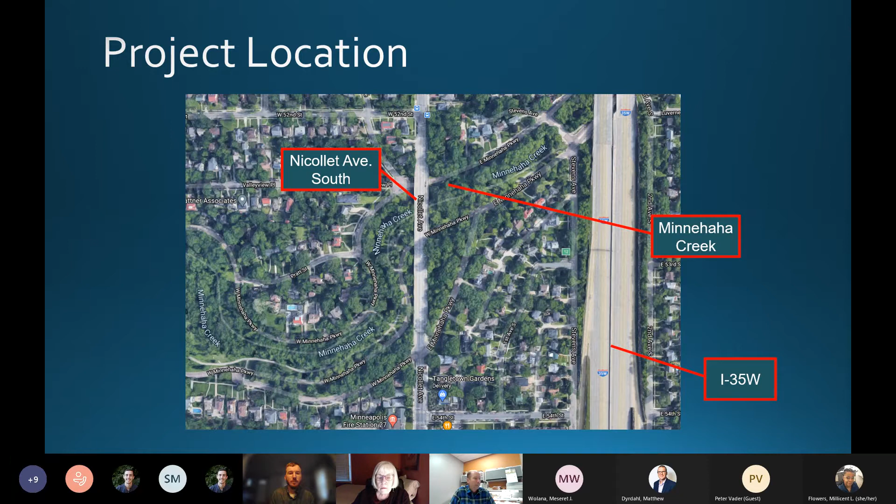There we go. So some history of the bridge. It was constructed in 1923, replacing an original bridge that was constructed in 1908. The current bridge was rehabilitated in 1973. At that time, the deck was taken off, and there were some repairs done on some of the cantilever floor beams, and new sidewalks were put on as well, and new railings. The sidewalks were widened again in 2002, to the inside.

They widened the sidewalks on each side to 12 feet, and then 4 monuments were also placed in the 4 corners. This was done as part of a neighborhood repair to the bridge to discourage speeding, for one thing, and also to add the monuments and some of the ornamental lighting as an aesthetic piece to the bridge. The bridge is eligible for the National Register of Historic Places as well.

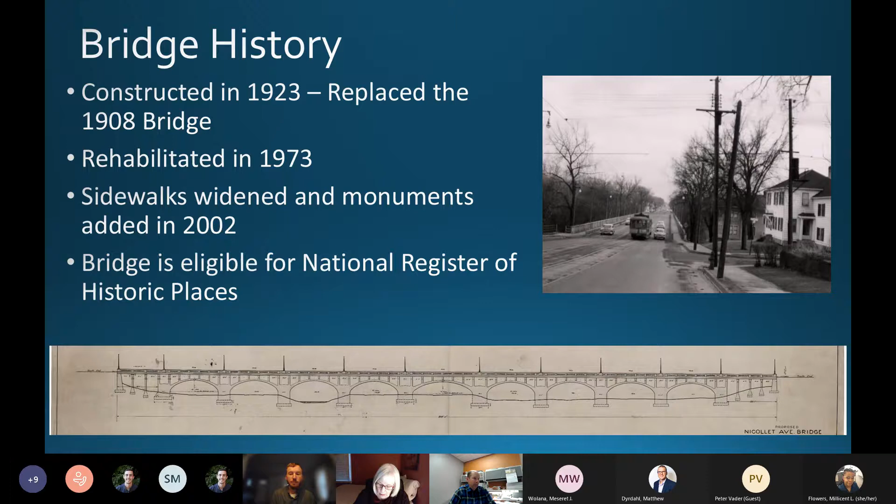Brief description of the bridge: it's 816 feet long, approximately 62 feet wide. There are 9 concrete arches and 7 concrete slab approach spans. 8 of the 9 arches span 60 feet. The center arch span, which goes over Minnehaha Parkway, spans 75 feet. The bridge deck is supported by floor beams, spandrel columns, and cantilever brackets, and the concrete piers are supported on timber piling.

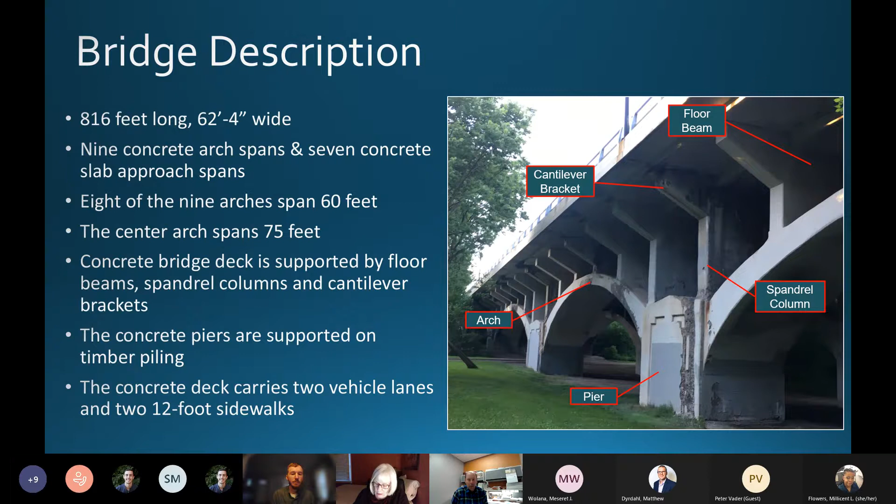So there's some nomenclature of the bridge there in the graphic. The concrete deck carries 2 vehicle lanes, 2 12-foot sidewalks, and also 2 7-foot bike lanes.

The need for the project is a rehab due to deterioration of the bridge's main structural elements: the deck, the floor beams, the columns, and the arch ribs and piers. Those need attention due to water infiltration through the many deck joints of the bridge, which has gotten into these structural elements, and concrete and reinforcement steel has deteriorated through the years.

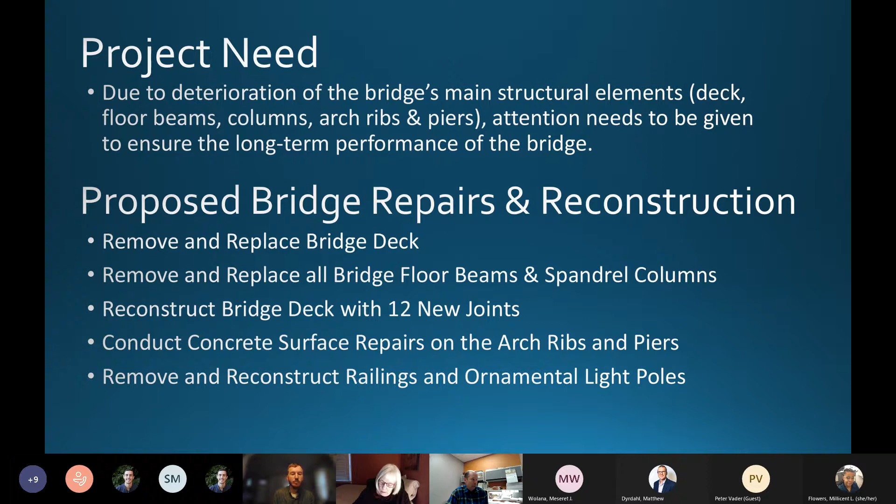Our scope is to remove and reconstruct the bridge deck, remove and reconstruct all the floor beams and spandrel columns. We're going to reconstruct the bridge deck with 12 new joints, significantly reducing the amount of joints that are there right now. We're going to conduct surface repairs on the arch ribs and piers, which will entail removing deteriorated concrete and putting reinforcement and new concrete back in its place. Lastly, we're going to remove and reconstruct the railings and the ornamental light poles.

Some of the constraints we're dealing with: structurally, the overall width is primarily governed by these floor beam cantilevers. We can't extend those any more than they currently are, part of this for historic reasons and part for structural reasons. So the overall bridge deck width needs to be slightly narrower than the existing.

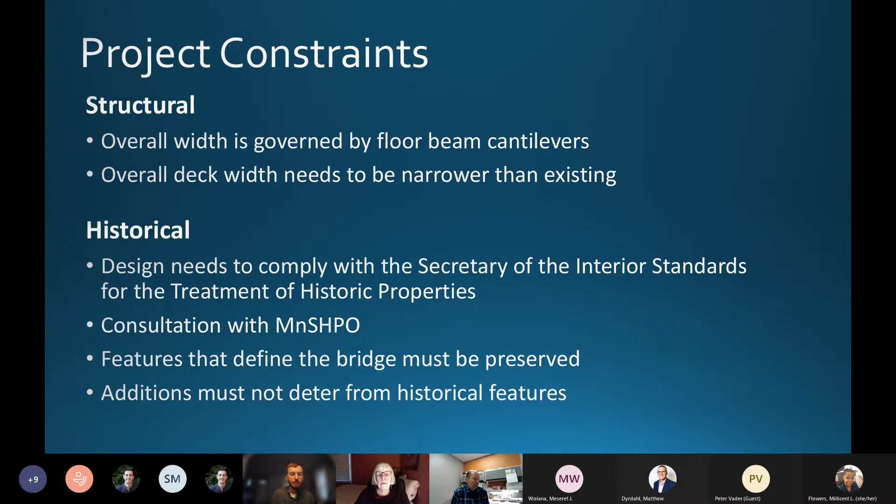Historically, the design needs to comply with the Secretary of Interior standards for the treatment of historic properties. We do have a historian on board; she will work with us in consultation with Minnesota SHPO. The features that define the bridge must be preserved. The main feature is the concrete arch, and the combination of the spandrel columns and floor beams is also a very important historic feature. Any additions to the bridge must not detract from the historic features.

Here's the project layout. Everything in orange is primarily the bridge, which is 816 feet long. We're doing some approach work on the south as it intersects with Minnehaha Parkway, and also a little bit on the north tying into Nicollet Avenue just before 52nd Street.

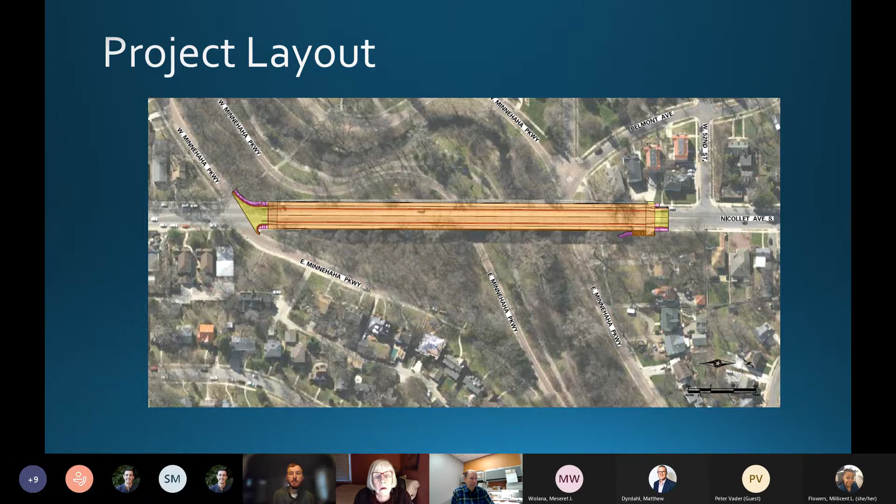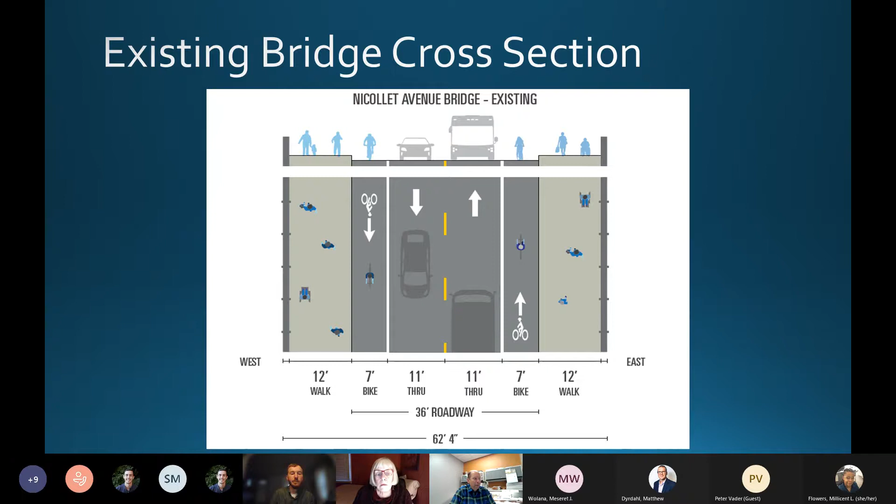Here's the existing cross section. Currently we have two 11-foot through lanes, two 7-foot bike lanes, and two 12-foot walks, giving us a 36-foot width for our roadway. We also have on each side of the deck a pipe railing—more like a pipe barrier—on top of a concrete parapet. The overall width of the bridge deck is 62 feet 4 inches.

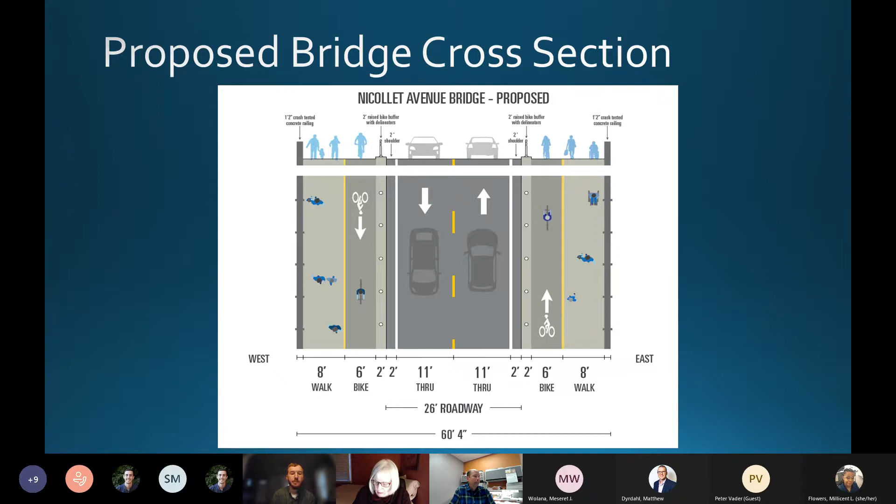This shows the south approach at the intersection of Minnehaha Parkway, where the two roadways come up to the bridge. This shows the cross section: an 8-foot walk, 6-foot bike lanes, 13-foot through traffic, and how we're transitioning into the existing conditions—a 6-foot walk, a parking area, a 6-foot bike lane, and a 13 or 11-foot through lane. That's on the south side.

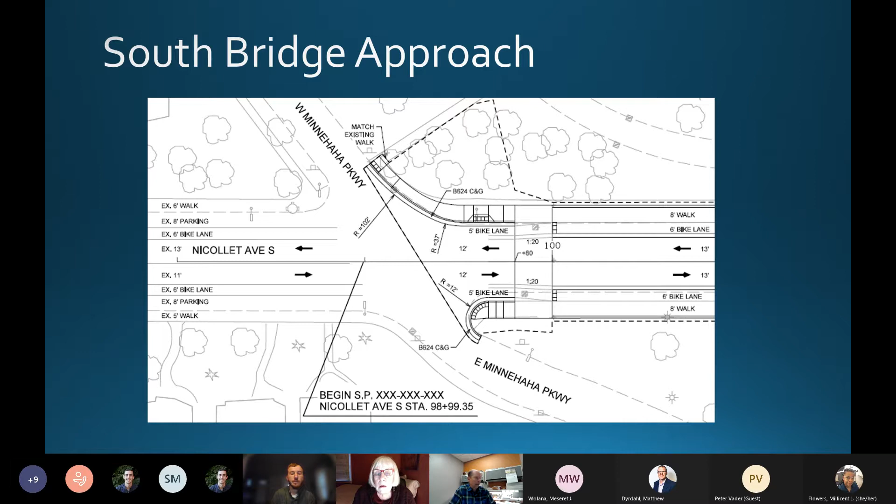On the north side, similarly, we're transitioning right before 52nd Street. The 8-foot walk will transition to an approximate 4.5 or 5-foot walk. The 6-foot bike lane will transition across 52nd into a 5-foot bike lane. Similarly, on the east side, we've got the 6-foot bike and 8-foot walk transitioning back into the existing condition as we head north on Nicollet.

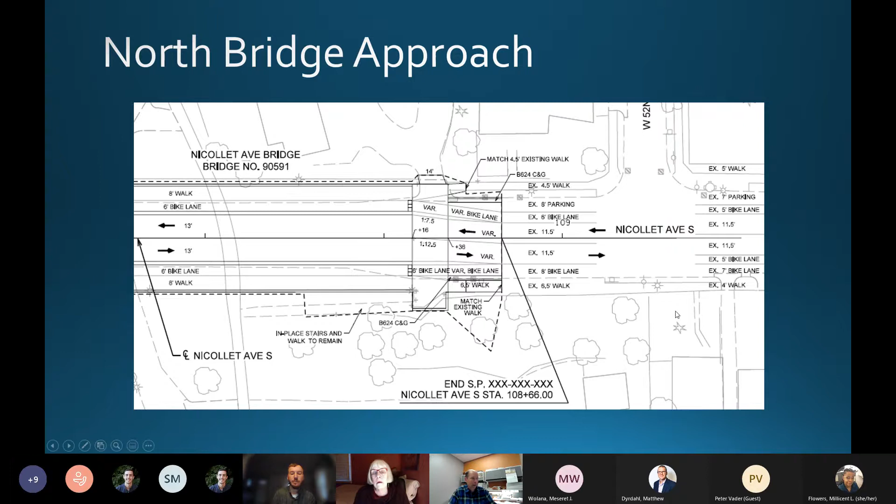The bridge railing—the existing railing is a metal pipe railing on a concrete parapet, approximately 4 feet high. The proposed railing will be similar to what we have out on the recently opened 10th Avenue Bridge, at 3.5 feet high. This railing also closely resembles the original railing on the bridge as constructed in 1923.

That is all I have as far as the presentation goes. Certainly could take questions.

Are there any questions for Mark or Forrest at this time? Or comments?

What is the plan for construction? We do not have a letting date right now. The city is still trying to obtain project funding for construction. I think it's in the STIP right now, maybe for 25 construction. So we're hoping to get some money in the next legislative session, or perhaps even with the infrastructure bill.

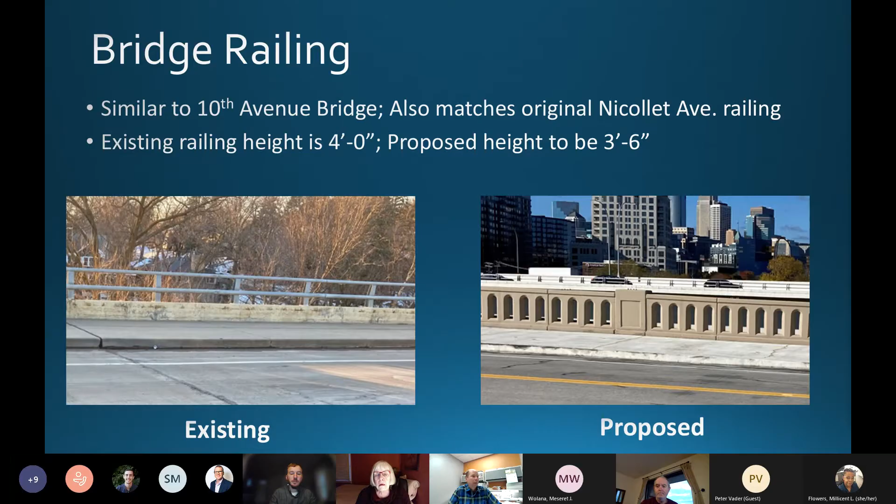Yeah, I can go back to it here. Just a minute. Actually, I got a real good photo of the 10th Avenue Bridge that was recently constructed.

So it's what we call a bike buffer. It's two feet in width and seven inches tall. So it's basically a raised median that's going to separate the vehicular traffic from the bikes. And then there's opportunities to put delineators on those as well, for let's say winter snow plowing, or just to define where they start and where they stop.

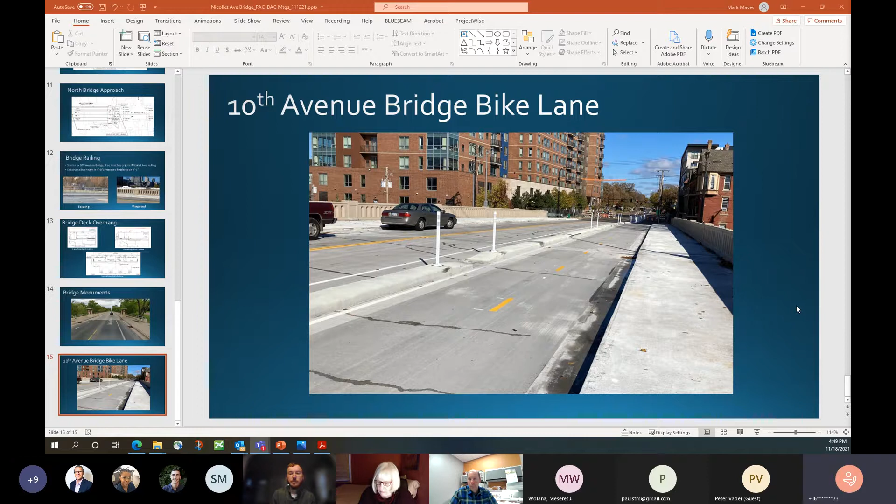I'm wondering if there are any adjustments being made to the design based on projected flooding for Minnehaha with climate breakdown. I know we've seen presentations from the park board around the floodplains and what's expected, but I'm curious in your planning how that's impacting design.

I'm sorry, I didn't get the first part of the question. The flooding, with the creek there. I don't have a sense of how it may or may not flood in 100-year or 500-year flood events, and the park board has come in front of us talking about ways they're looking at mitigating the impacts of extreme rainfall events from climate breakdown in that area. I'm curious how that is impacting your process.

I don't think it'll impact us too much. We're primarily working at a considerable height above that. Our arch ribs are primarily above that 100-year event. We're not doing anything to the grading around the bridge, and we aren't doing anything to the pier columns or the pier foundations. So I really don't think the water level is going to affect the rehab that we're doing. This thing is considerably higher than, let's say, the 100-year water elevation.

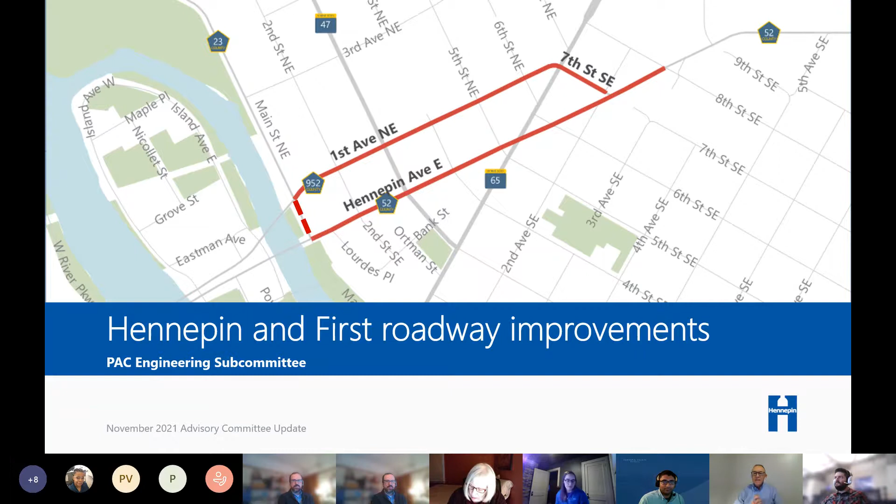So hit the next slide, Cody. We're here to talk about Hennepin and First multimodal improvements, and we'll get to what that is in a moment. But first, where we are in the process.

We were here before this group about a year ago, done a lot of work in the interim, and we're down to 2 concepts right now. Today we're here to start sharing those concepts with you. We're at the start of approximately a 30-day engagement period. We kicked it off with an open house last night, and so we're very happy to be back here with the Pedestrian Advisory Committee to talk about some of the pedestrian improvements we intend to implement there.

Next. Thanks, Cody. So the project area we're talking about is First and Hennepin, from Main Street up to 8th Street, where the 2 roadways come back together. Since we were here a year ago, we've actually added a small piece - a block of Main Street between First and Hennepin - in cooperation with the Minneapolis Park and Rec Board. They have identified funding to put in that missing link in the trail system right there, and so we are working with the Park Board to design as part of this project, and ultimately to construct as part of this project, that piece of the seam.

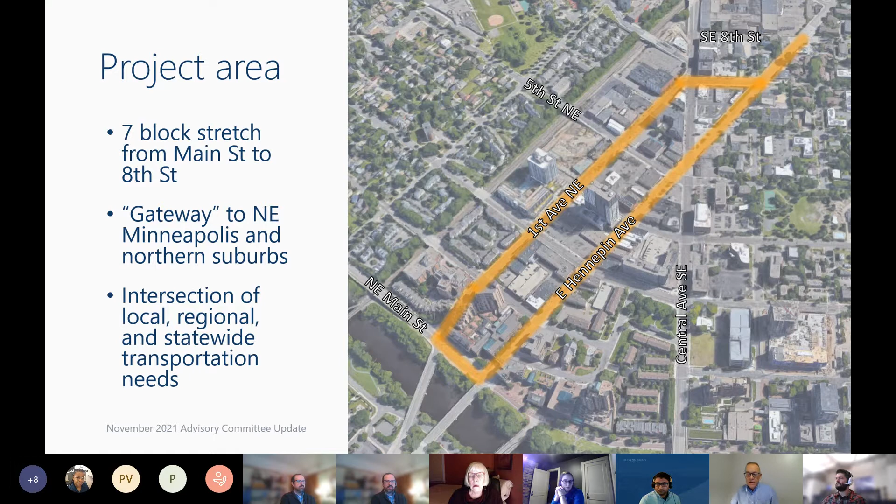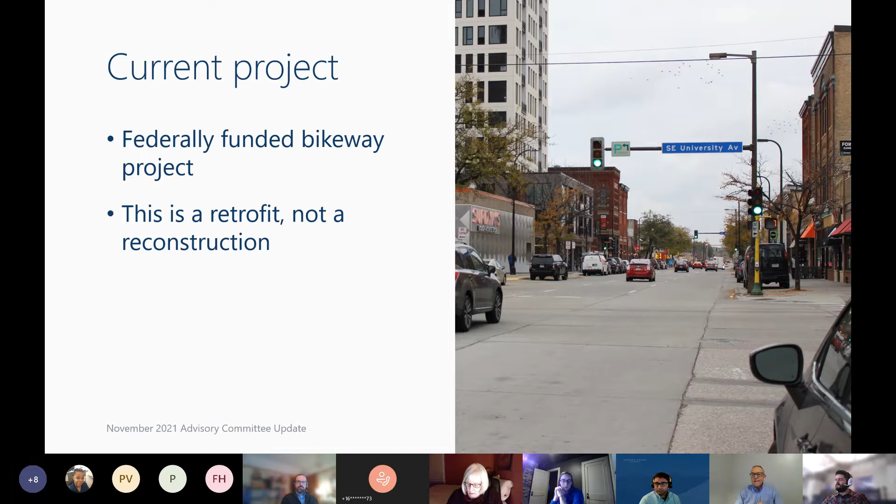Next slide. So the current project is a federally funded bikeway project. The scope of the project is to add a bikeway to First and Hennepin in that project area. In addition, we are making accessible pedestrian improvements and replacing traffic signals through this area, including accessible pedestrian signals. Importantly, this is not a total reconstruction of the roadway, which somewhat limits the scope of what we can do here. It is a retrofit, so we'll leave the roadway as is, and we will add a bikeway to it, as you'll see in a little bit. Next slide.

So the schedule: we are currently in the early stages, the planning phase, and we intend to be in that planning phase for the next few months, at least into 2022. At the bottom of the screen, we have completed the first phase, existing conditions. We've developed a vision of the corridor, and we're towards the end of the second phase, which was to develop, test, and evaluate corridor concepts. We've run a number of concepts through our project management team, and we've settled on 2 to bring out to the public, which you'll see here in a little bit. The next phase, over the next few months into early 2022, is that we'll select one of those alternatives, put more preliminary design into it, and ultimately take it to the city for approval.

After that, back up to the top there, the blue bar, we will be into design of the facility, out of the preliminary and into final design from 2022 into 2023. We anticipate construction in 2024, and we do anticipate it just to be a 1-year construction project. That will sync up pretty well with the proposed E-line construction as well for Metro Transit.

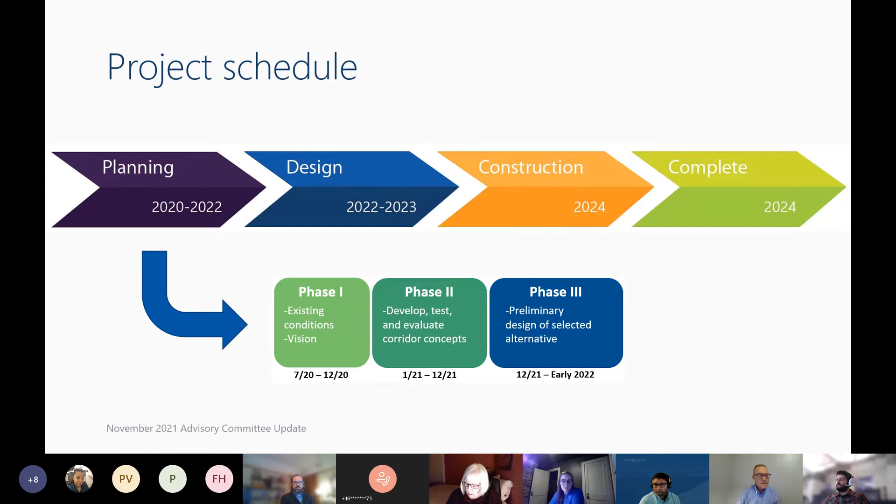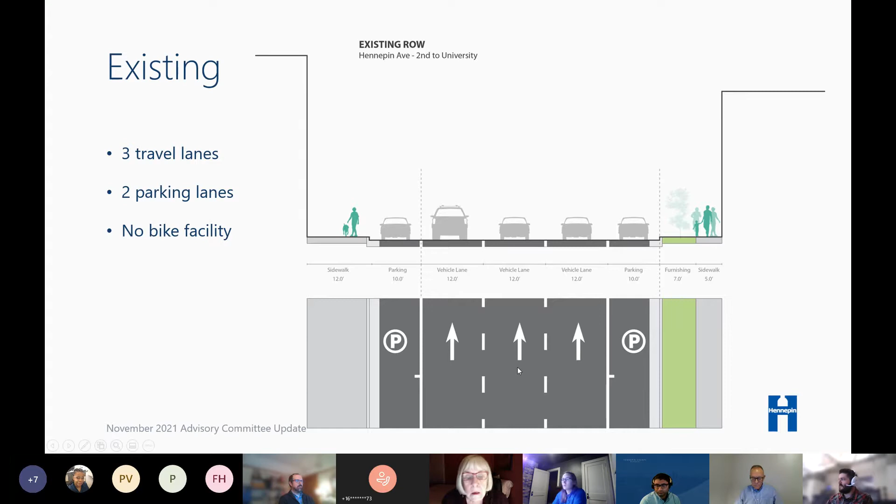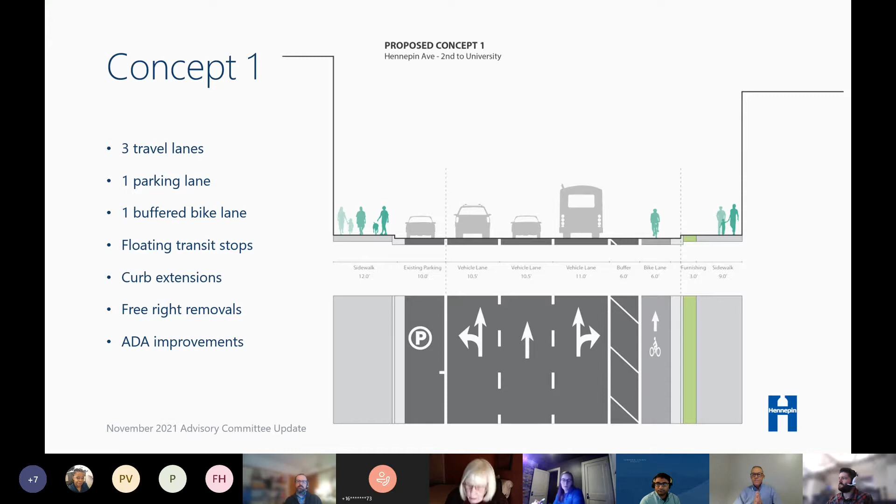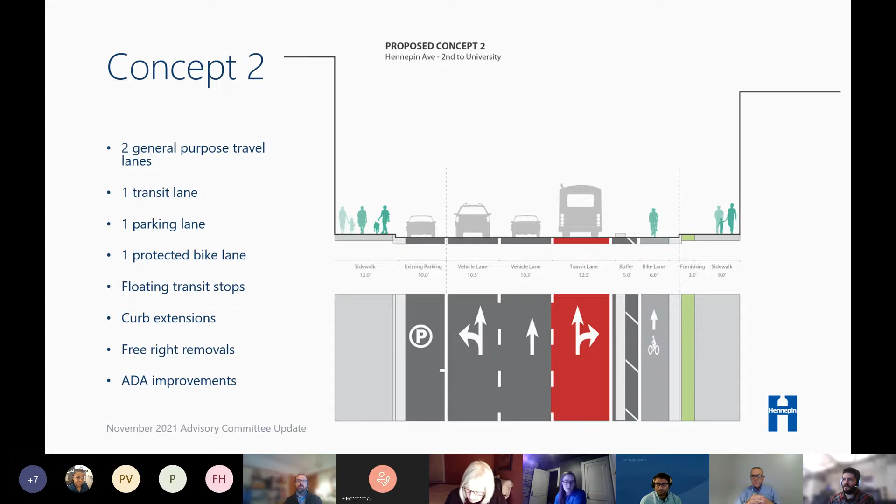Our concept 2 creates a separated, or protected, bike lane on that same side of the roadway. So we install that curb, similar to what was shown on the previous bridge project. Then here we have that rightmost travel lane dedicated to a transit lane, keeping 2 general purpose lanes on the left side along with the parking. Again working with the existing curbs where we can. Similar to concept 1, we have the floating bus stops, curb extensions, free right removals, and ADA improvements.

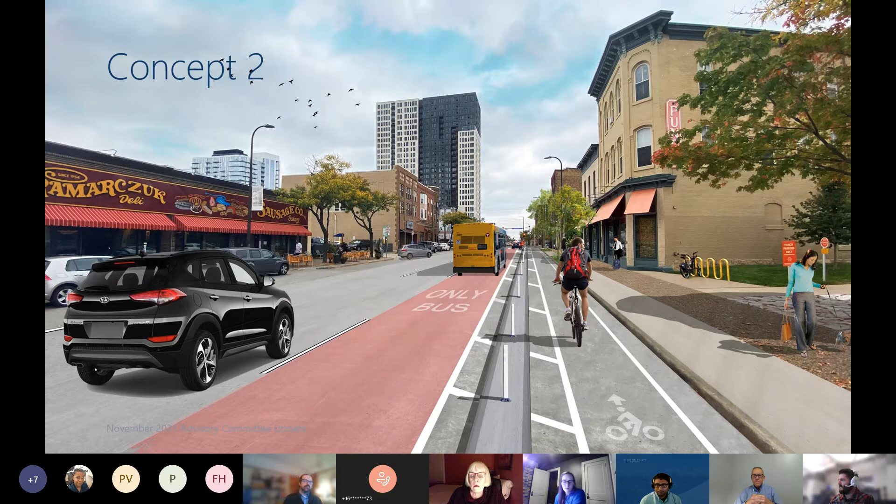So here again is a rendering of that same location for concept 2, showing that transit lane and protected bike lane along the right side of the road.

So I want to hit on a few things that are included in both concepts but are key features of what we're trying to do with the project. We are proposing removing both channelized right turns along First Avenue. At the intersection of First, Central, and 7th, there's a free channelized right turn coming off Central onto First. We are proposing to remove that while keeping the driveway access for that particular property.

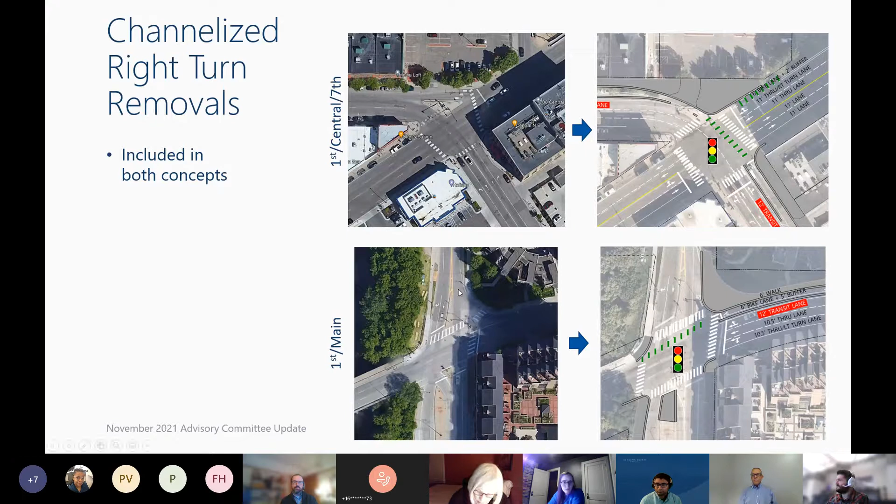The second one is over on Main Street at First Avenue, where again you have the channelized right turn going westbound on First and getting on Main Street. We are proposing to remove that free right movement, still including a right turn/through lane, but making that a much safer area for those walking and biking to get around these intersections. That's included in both concepts.

Another thing included is filling the gap on Hennepin Avenue between Main and 2nd. That's also included in both concepts, but we are proposing to fill that sidewalk gap as well.

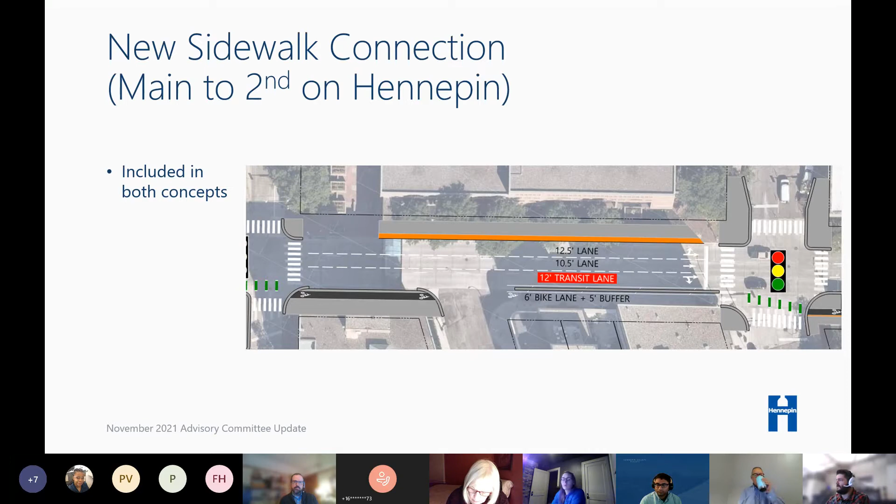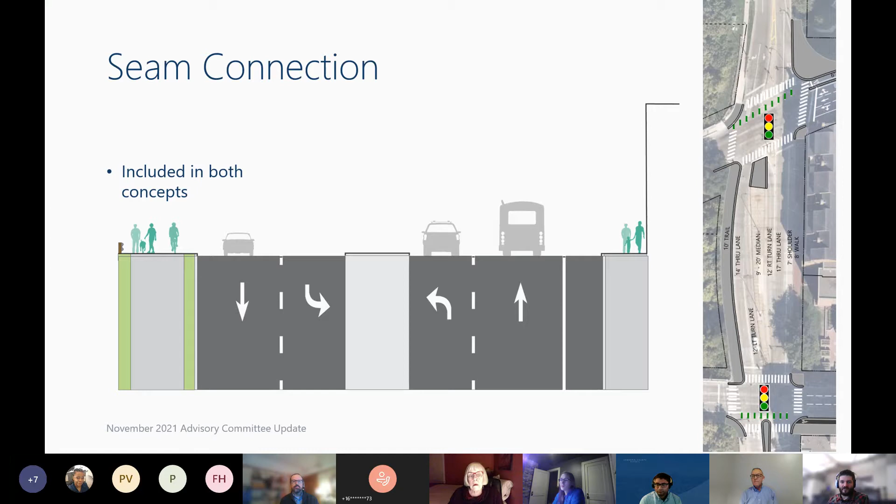Touching on Main Street, as we progressed this project we were able to coordinate with MPRB to get this regional trail connection included. We're working a bit within the existing roadway. Along the river side of Main Street there's a guardrail protecting from a steep embankment down to the river, so we're working on the inside of that guardrail, proposing to shift some curb over to make room for a wide shared use path through that section. There are very wide shoulders and lanes on that southbound Main Street piece, so we're able to fit that in.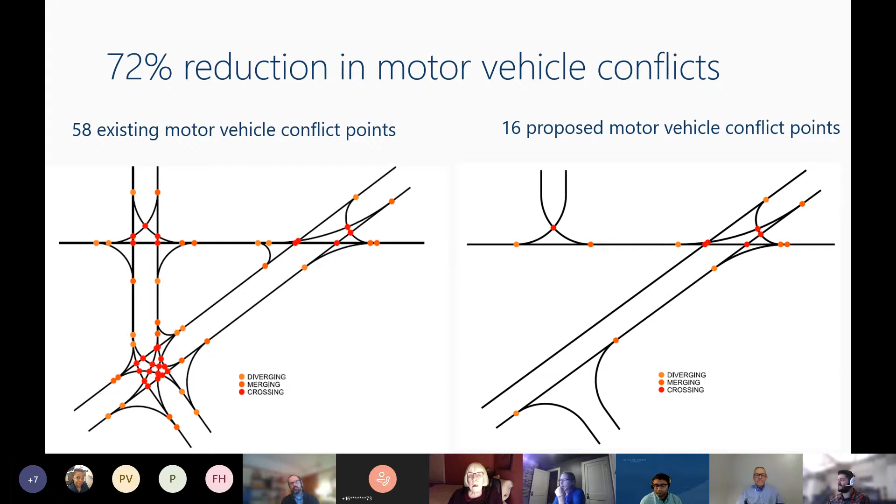Touching again on those conflict point reductions: from a vehicular standpoint, there are 58 conflict points in this triangle, basically where we could expect a crash to occur. With the triangle concept, that number is reduced to 16, which is over a 70% reduction. From a pedestrian standpoint, that change in the intersection has a 40% reduction in pedestrian-vehicle conflict points. For bikes, it depends on how you're traveling through the area, but it would likely be somewhere in between those two percentages.

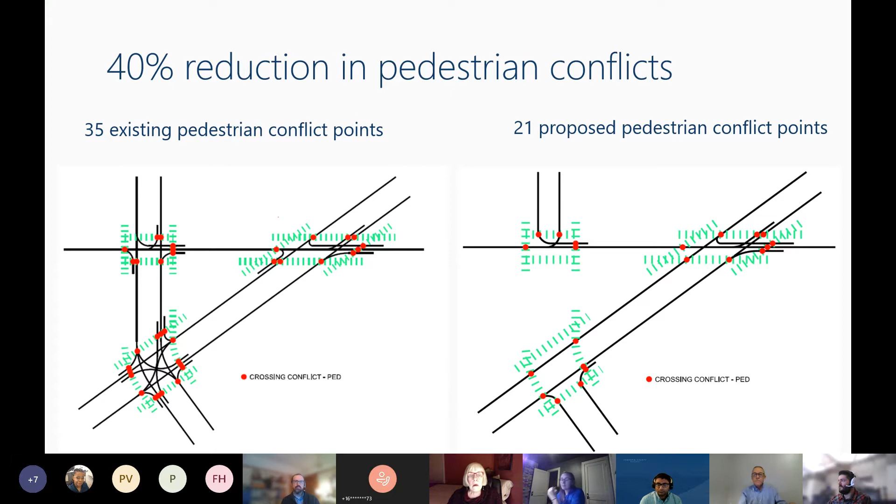So circling back to what Scott went over with the evaluation goals - here's the list of those 8 goals that he went through and how these 2 concepts, along with a no-build or existing conditions scenario, compare with one another.

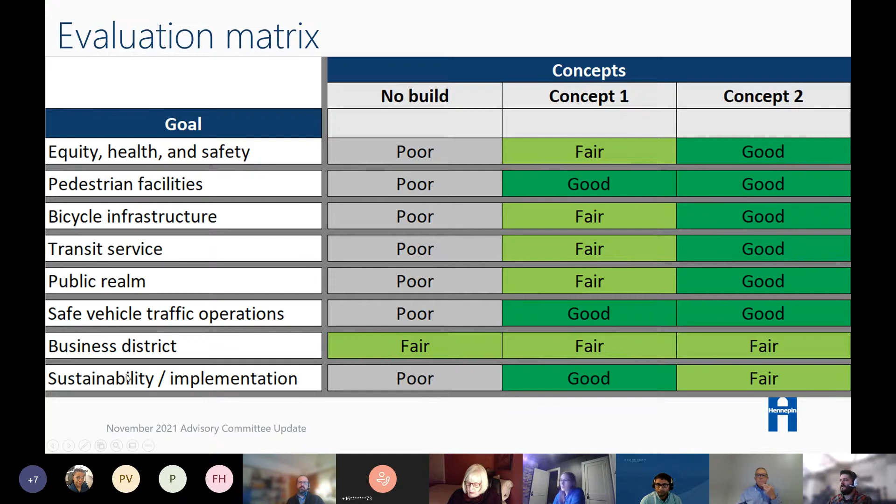These goals all had a number of measures associated with them that looked at various things we could analyze. These gradings of poor, fair, or good are kind of an average of those different measures. That's how that all came to be, and we can go into more depth on any of those, if anybody would like. So just wrapping things up here so we can open up for questions.

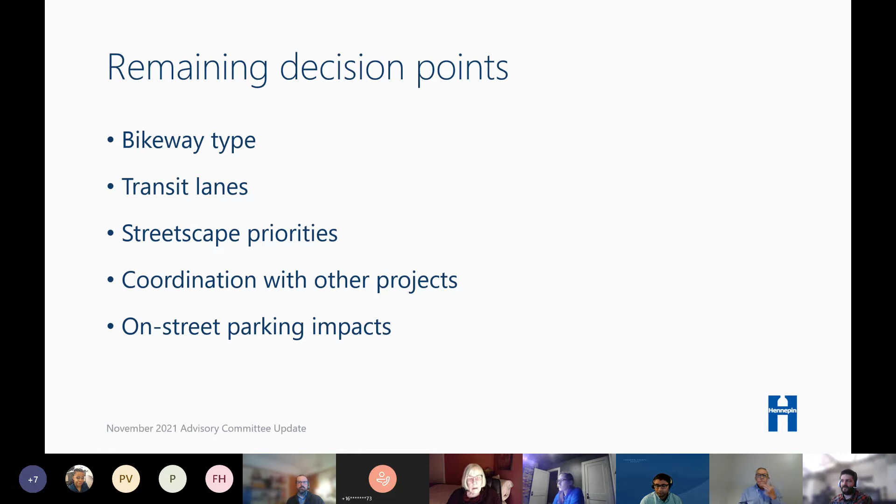Some of the remaining decision points we have going through this engagement period are what that bikeway type is, if there are transit lanes or just general purpose lanes, what the community's streetscape priorities are and where those could be located, as well as coordinating with other projects. As Scott mentioned, the Metro Transit E-Line is in the area. We're also coordinating with MnDOT and their projects in the area, and working with residents and business owners on those on-street parking impacts.

So next steps: continuing this targeted outreach and coordination, and then refining the design of that preferred concept so we can come back in early 2022 with a project update of that final preferred concept.

Anything I missed, Scott? Josh? One thing I will add is that with your agenda packet, we did include layouts of both of these two concepts, so you can jump into them and dive down into the actual details. We stayed at a pretty high level here and just showed you the typicals and the renderings, but there is more information there, and you can get a feel for those on the layouts as well. We're prepared to take a look at those if you want to dive into those today. So we'll stop there and open it up for questions to the committee.

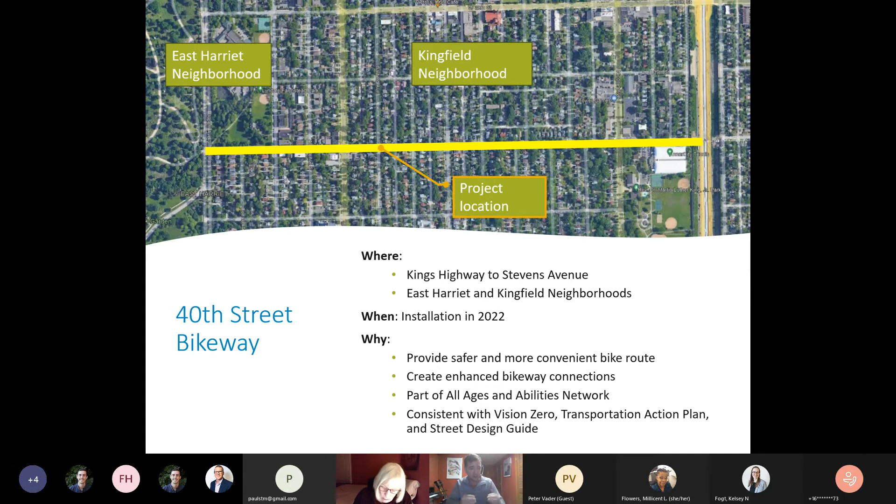The other thing I'll mention is this project will leverage existing intersection improvements being built as part of the Bryant Avenue project, and already built as part of the Grand Avenue project. Those projects put in a bend-out protected intersection design, and this bikeway will feed right into those. With that, I've got a couple of context slides here.

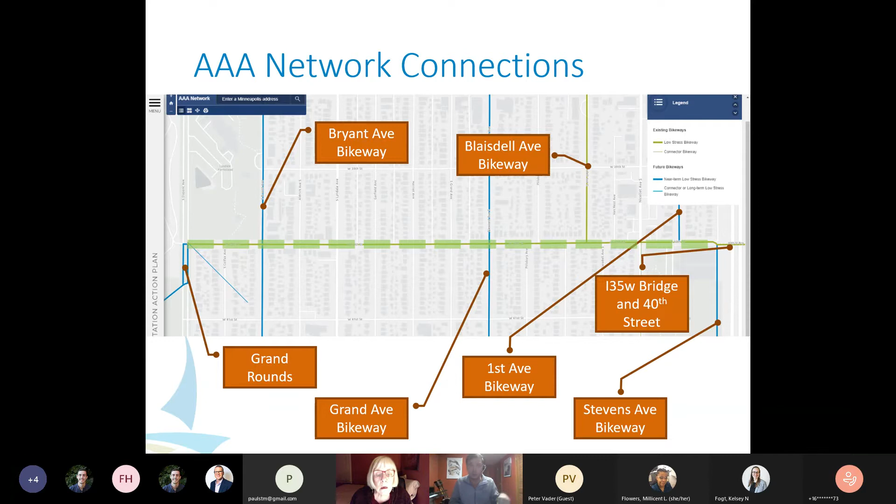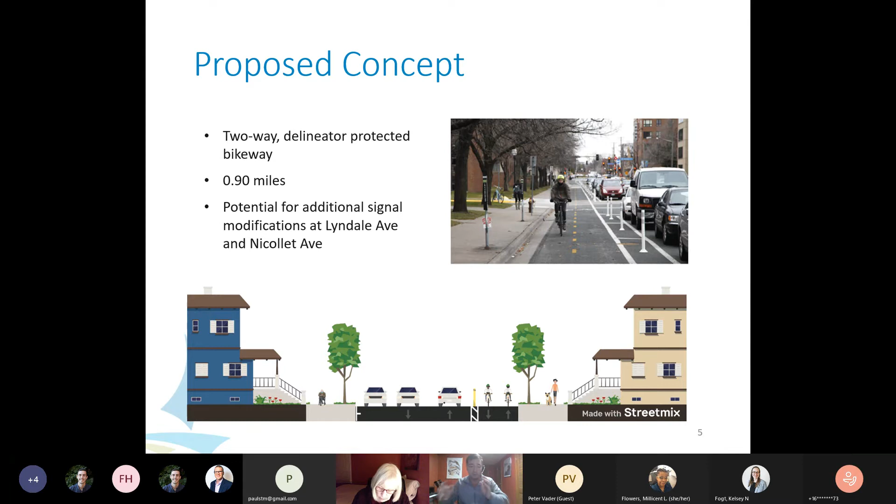There is some very minor signal work. There are 2 traffic signals on this corridor, one on Lyndale and one on Nicollet. It's just adjusting some mast arms so that we have good sight lines with the new bike facility.

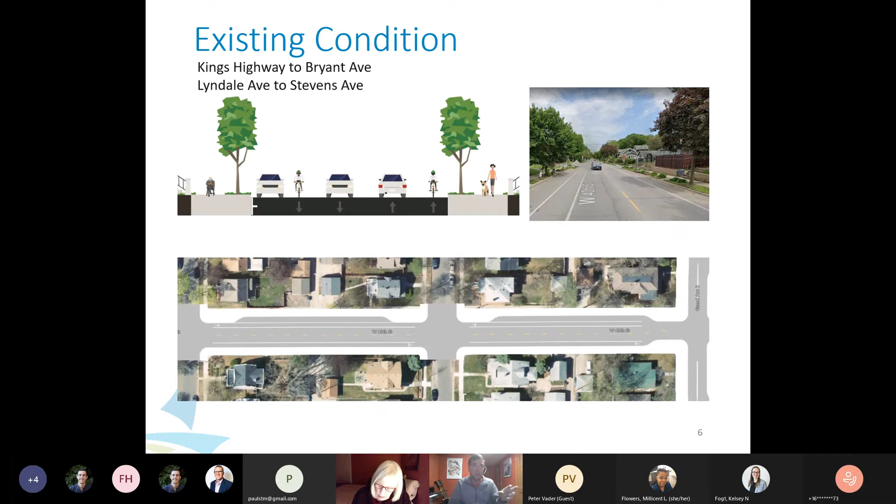So this is meant to be a representation of what the corridor looks like today. You can see the quick street view snapshot, but for most of the corridor, what exists is on-street parking on the north side, bike lanes in both directions, and 2 travel lanes. That's all of the corridor except for about 2 blocks. I'll get to what the exception is in a minute.

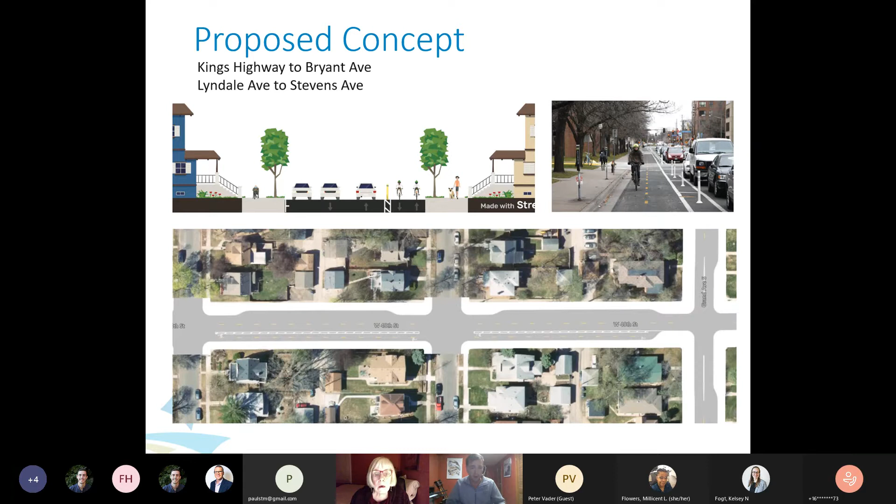Okay, so this is the exception, and this is really the rub of the project. I said that the entire mile is essentially parking on the north side of the street only. The exception is there's a 2-block stretch from Bryant Avenue to Lyndale Avenue. As it sits today on that 2-block stretch, there is parking on the north and the south side of the street. This on-street parking serves an existing business node.

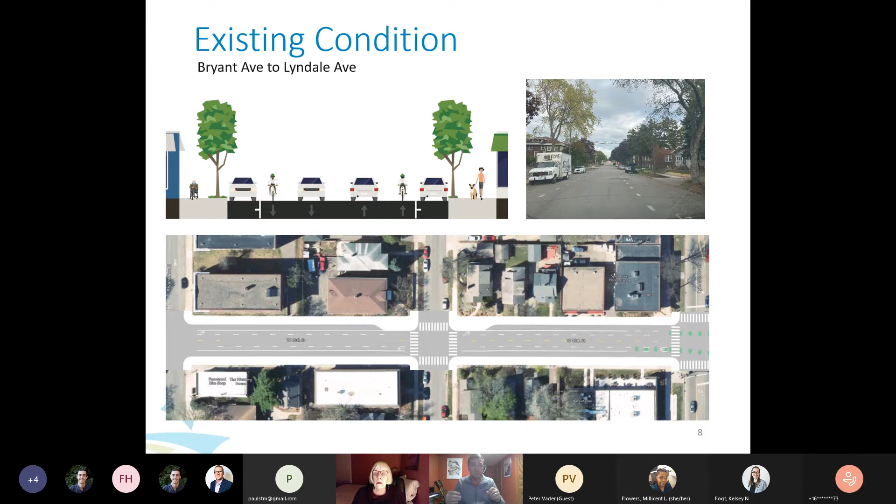If any are familiar, there's Farmstead Bike Shop, which is on Bryant. There's LaRue's, which is that cool gift shop on the Lyndale side. There's a new restaurant on the south side of the street there. So that's the neighborhood we're talking about.

With this project going in, the proposed condition would eliminate parking on the south side of the street. So we lose about 19-ish parking spaces, depending on how you measure that. The existing parking on the north side of the street would remain, as with the rest of the corridor. But in this 2-block stretch, there is this impact of eliminating the on-street parking to facilitate this bikeway.

So there is a lot of engagement. What was that? Would it be metered on the north side to help with the turnover?

It's not metered today, no, and we wouldn't put meters in. There are the timed signs, if that makes sense, like the post that says a 30-minute limit, that kind of thing. So this project wouldn't necessarily install meters that aren't there today, although that's something the existing adjacent businesses could look at in the future.

So that's the rub. We have done some outreach with the businesses, we're talking with them. Scott McBride mentioned in the past presentation, we don't want to minimize the impact to the businesses. It's a hard time for everybody, and on-street parking and front door access is important to a lot of these businesses. But that's kind of the trade-off we're looking at.

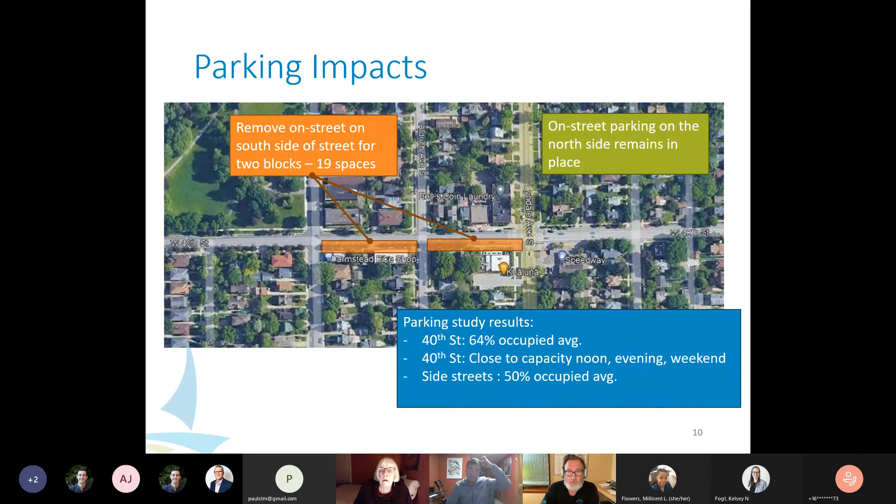Peter? Yeah, thanks. Can you show the Nicollet intersection and also the connection to the 40th Street Bridge over 35W, which was left a little unfinished—after being opened two years early, they kind of left this corner anyway. So I just wanted to see how those are. The Nicollet intersection, crossing Nicollet at that intersection, is difficult and has been difficult.

I can show those. I'll note that it's very concept level, and I'm killing time while I open up the drawing, so bear with me here. The point I'd make is that in terms of design, we're at maybe the 0 to 10% design phase right now. There's some detail left to work on in terms of what goes where.

I'm sure what you're seeing is that there's a ton of traffic that comes up Blaisdell, makes that left onto 40th, and then right again on Nicollet. In an otherwise quiet corridor, I agree, that's probably the hectic part.

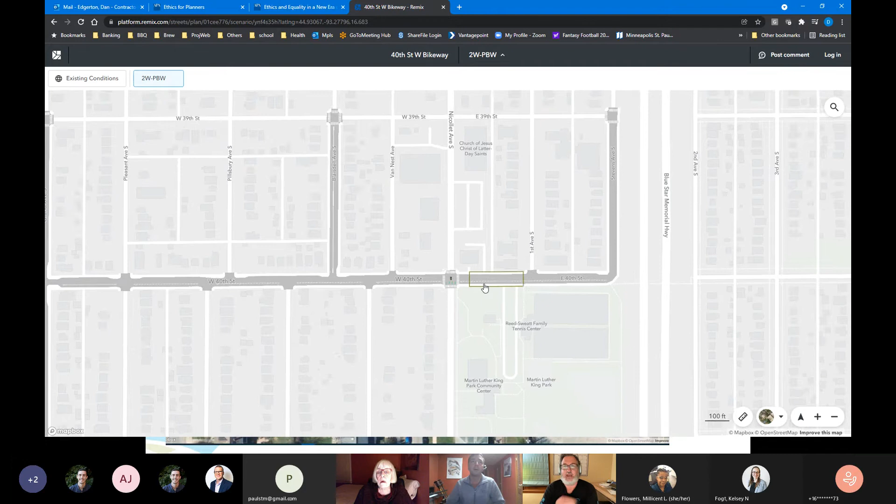Can you see the screen? Can you see the new drawing that comes up? The rub here is that because it's not a capital project, we're not changing any curbs or anything like that—it's basically striping through the intersection, so we'll do the colored stripes. The other change at Nicollet is the mast arms will be adjusted. Today there aren't mast arms crossing 40th Street, just across Nicollet, so they're adding mast arms in all of the approaches. That's a sightline thing so people can be aware of what's going on. So it's pretty minimal in terms of changes, because it's not a capital project.

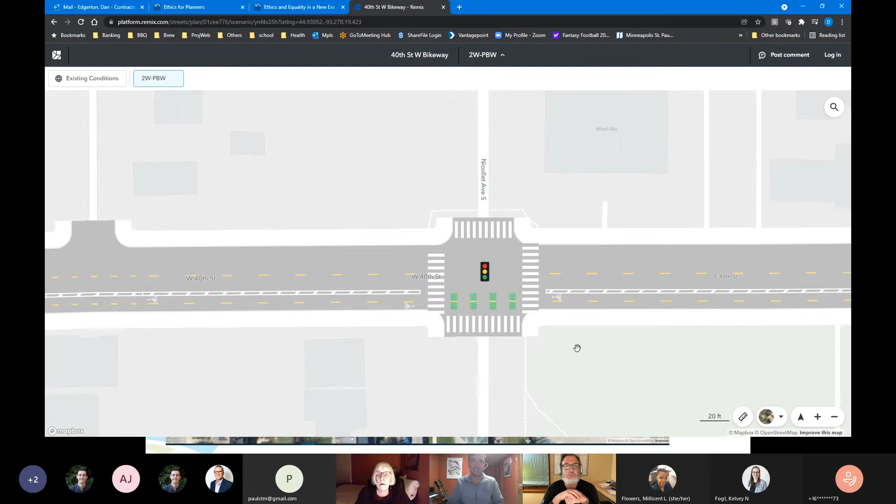This project really only goes to Stevens Avenue—we're not taking on the connection all the way to the bridge with this project. I've heard that comment before. It's something we're going to take a look at, but it kind of dumps off where the existing curb cut is, and that's about what we get. It's the same answer: we're trying to shoehorn this one in with the existing seal coat project, and it's not a major capital project.

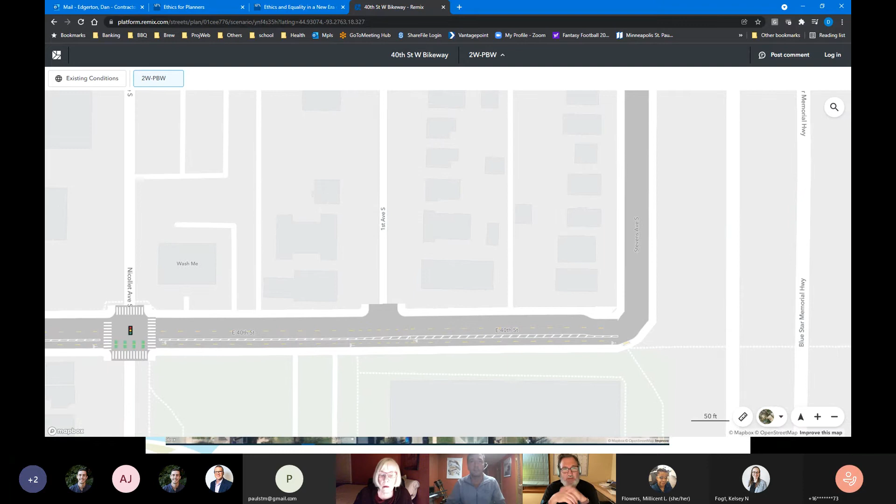Well, carving out space at all at Nicollet is going to be a big help, rather than coming off that bridge and then trying to cross and continue westbound. To have it all in one place, I think, is real promising. Yeah, thank you—improvement. Yeah, thank you.

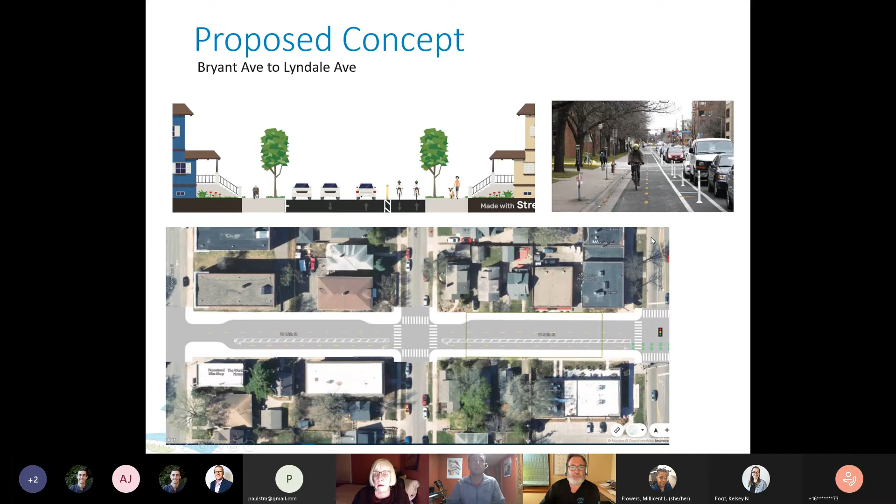Any other questions or comments for Dan?

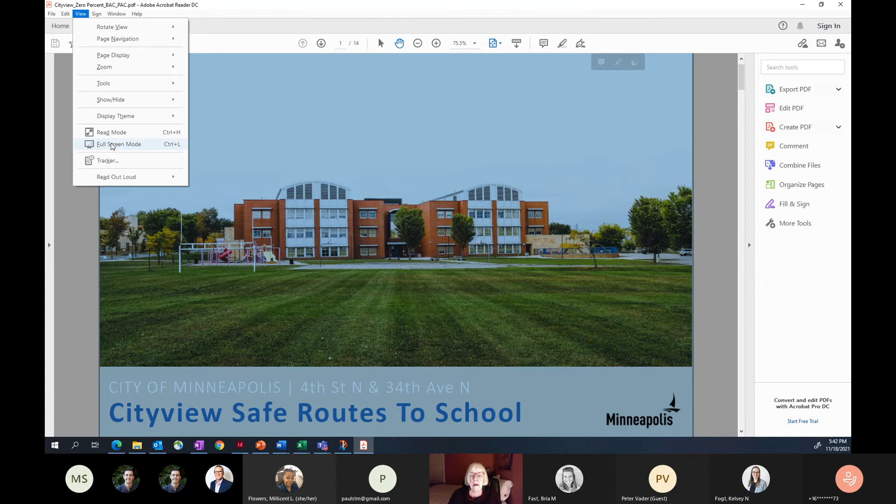All right, again this is the Cityview Safe Routes to School project. The construction will take place in 2023, so right now we are at 0% and doing engagement. Concept development should be starting pretty soon. I'm just starting to wrap up most of the 0% engagement, moving into concept development in December, January, and February. So I'm sure I'll see you again then, and there'll be another round of 15% engagement to go along with and coincide with 15%.

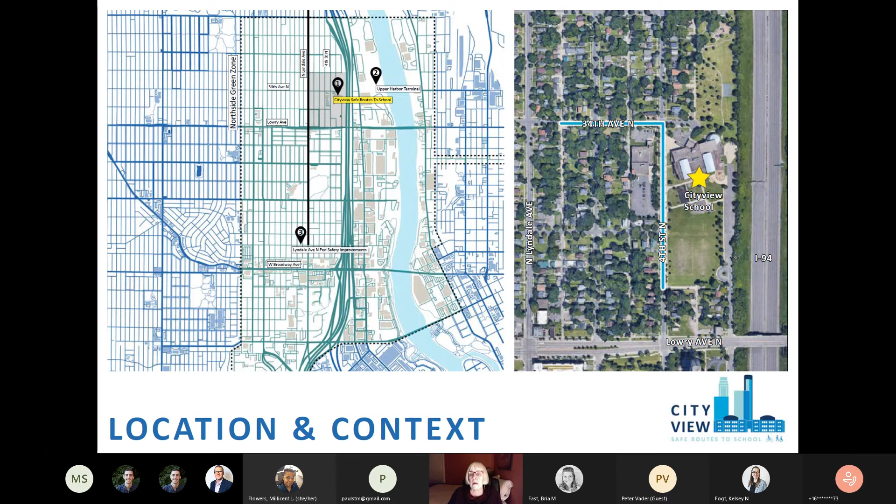Goals: to make it safe, convenient, and fun to walk and bike to and from Cityview School, to enhance some of the bicycle and pedestrian networks, as well as neighborhood amenity connections—such as a park directly to the north that's just getting built out now—and to integrate traffic calming elements that reduce vehicle speeds adjacent to Cityview School. We'll go into this a bit, but excessive speeding is a huge issue, especially on 4th Street. And then, of course, to fulfill city goals: complete streets, Vision Zero, all ages and abilities bikeways, transportation equity, and climate action.

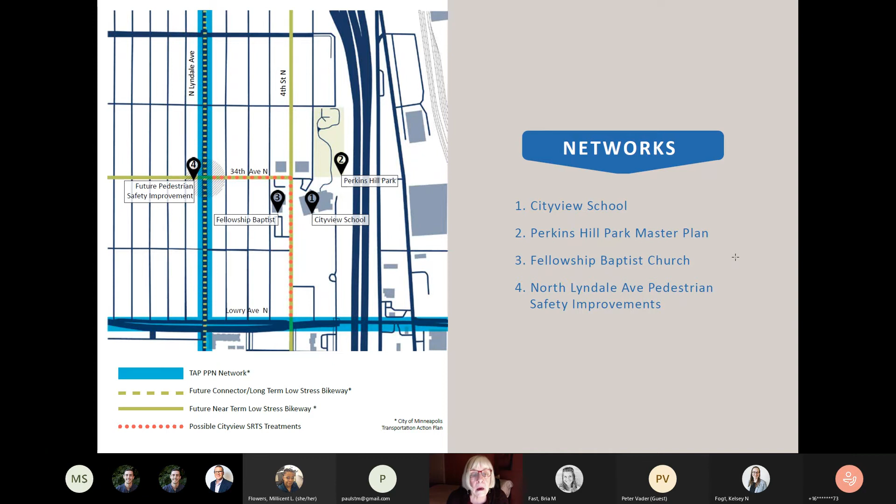There are a few networks I wanted to start out by showing how everything fits together here. Again, you can see Cityview School, that's number 1. The red dots would be the proposed project route right now. I'll show another map in a couple of slides showing possible route extensions, but for right now this is the most basic proposed project route, that red dotted line. That layers on top of future near-term low-stress bikeways from the Transportation Action Plan on 4th Street North, as well as 34th Avenue. And then, of course, it runs parallel just about to North Lyndale Avenue, which is the TAP PPN network, as well as a future connector and a long-term low-stress bikeway.

So it's possible that the route on 34th could extend past and west across Lyndale. We've also found that 4th Street North is a huge cut through. There are folks exiting I-94 at Dowling, just north of the project route, who are driving super fast south on 4th Street to get to Lowry. So it's possible that some traffic calming treatments could extend further north a couple of blocks past Cityview School to try to slow that traffic down.

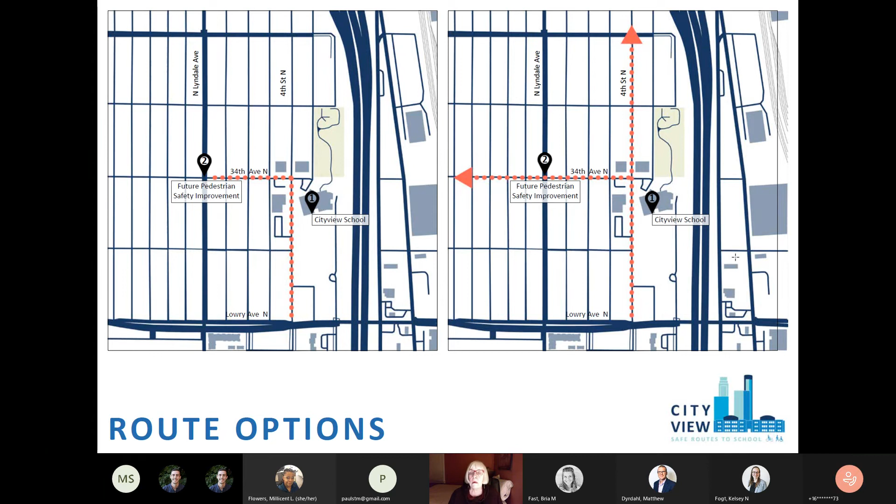Some of the existing conditions: there's been increased parent drop-off, and there's been significant bus driver shortages recently, which has increased parent drop-off and pickup. Sometimes, unfortunately, buses are not able to pick children up, and parents who weren't planning on dropping kids off now have to, and are in a hurry. It also happens that sometimes bus drivers don't show up to pick kids up. So it's a little bit chaotic during pickup and drop-off, and I want to take that into consideration. It's adding to some congestion on the street as well.

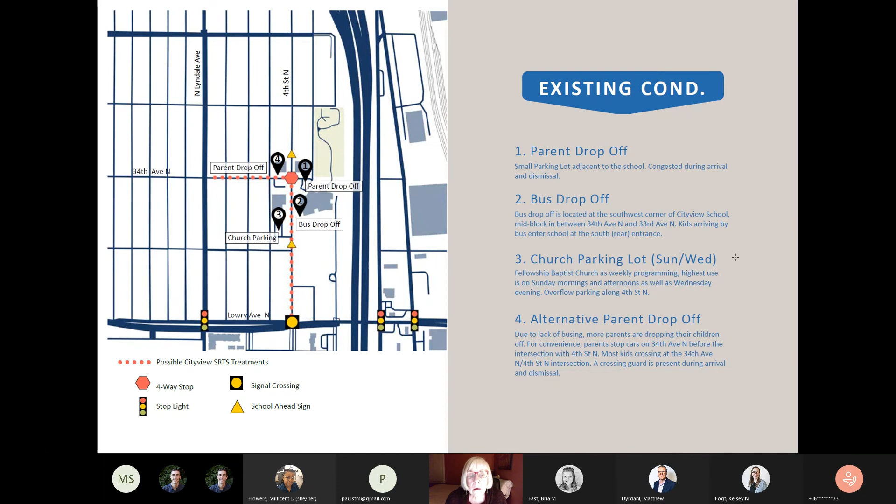And then that number 4: because there's increased parent drop-off and a bit of a chaotic situation on 4th right across from the school, we've seen a lot of parents dropping their kids off just before the 34th and 4th Street intersection, trying to avoid some of the congestion and traffic. So they'll drop their kids off there, and most kids who are walking or biking, either from their homes or from a car, are crossing at that 34th and 4th Street intersection.

Some existing conditions we just talked about: excessive speeding, weekend and evening church traffic, and demand for signage. There are two school ahead signs to the north and south of City View, but a lot of teachers have said they're difficult to see, so signage is a problem. There's been a lot of requests for more or more visible signage, increased parent drop-off like we talked about, and a demand for quick solutions. Especially teachers and neighbors who live on 4th Street would really like to see something go in before 2023. Of course, the project cannot get built before 2023, so that has led us to start looking at temporary or possible quick build treatments, which could happen sometime in summer 2022.

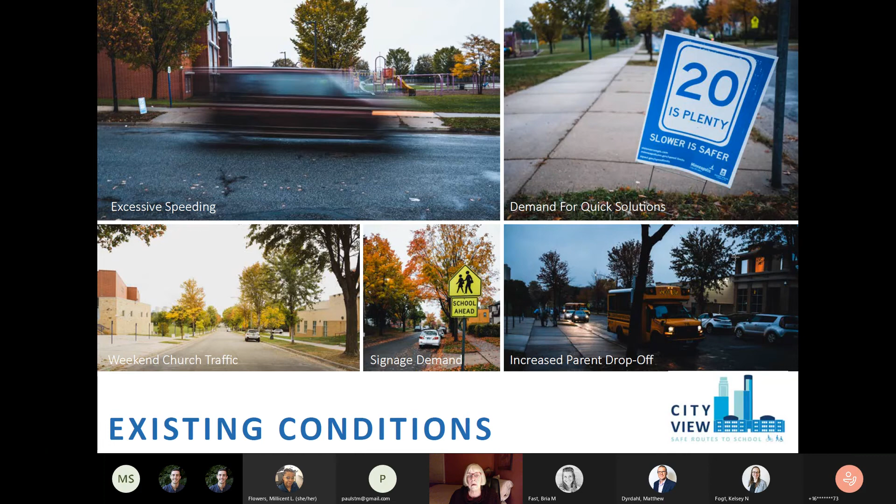Some engagement has already been done, more is planned. There was a walk, bike, roll audit at this location—16 adults and 6 children were able to come out for that. It was a great turnout, a wonderful event. I was also tabling at the City View Parent Teacher Conference Night.

What I heard from both events was mostly the same thing: people are driving way too fast on 4th. People would like to see more school zone signage and more school zone designation, and they're hoping, if possible, for a quick build treatment or more near-term solutions. These statistics are based off of 16 people, so 86% makes it sound like a lot, but what this is trying to convey is that across the board—this group was comprised of people who lived very, very close to this route, if not directly on the proposed project route—everybody was saying a lot of the same stuff.

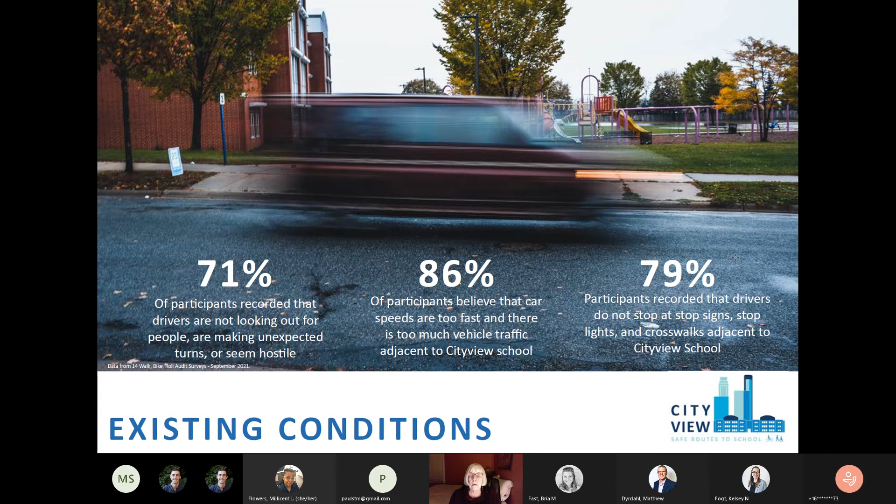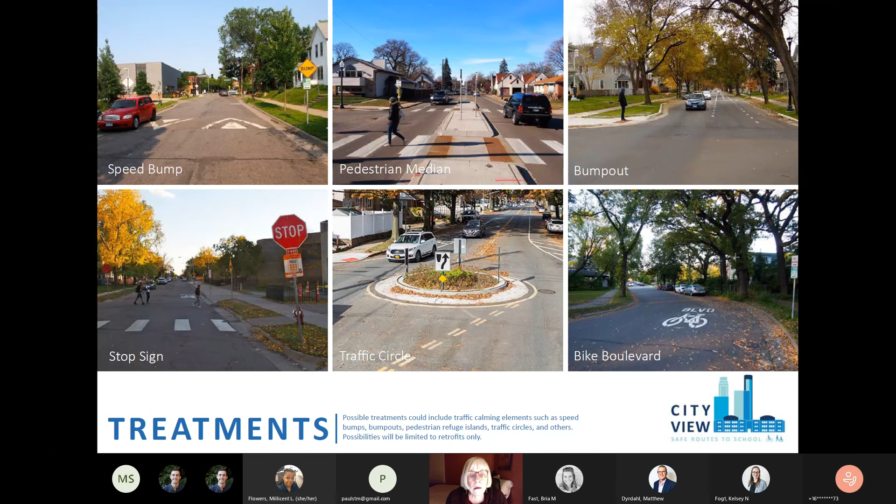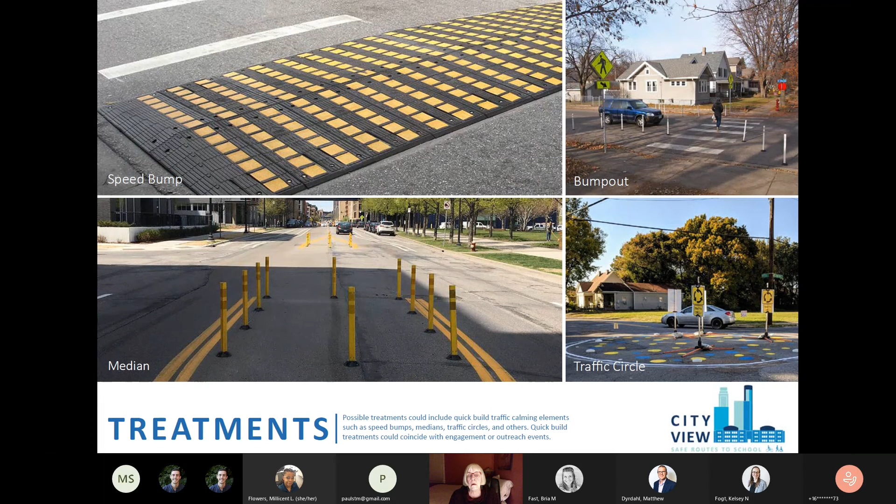Possible treatments include a typical suite of traffic calming measures: possibly speed bumps, pedestrian medians, bump outs, stop signs, traffic circles, and bike boulevard designation. As for the quick build treatments, again this is all just possibilities—we're not sure what's going to happen yet, but some of those temporary treatments could include speed bumps, bump outs, traffic circles, or medians.

Next steps, we're continuing with a bit more engagement. There's an online survey going live on Monday that will be active for 3 weeks, targeting parents and families at Cityview School, as well as folks who live within 2 to 3 blocks of the proposed project route. It's asking a lot of the same questions folks were asked at the walk, bike, roll audit.

We're really trying to narrow down what treatments, taking the public temperature on what treatments they're hoping to see and where, and getting a feel for how many of the people responding are parents or have kids who are walking, biking, and rolling to the school, where those kids may be coming from, and what some of the barriers could be.

And that is it for my presentation. I would love to answer any questions or take any comments if folks have them.

Do you have any sense of how many kids might be within easy walking or biking distance if it weren't so scary to get there? If the drivers were not so dangerous?